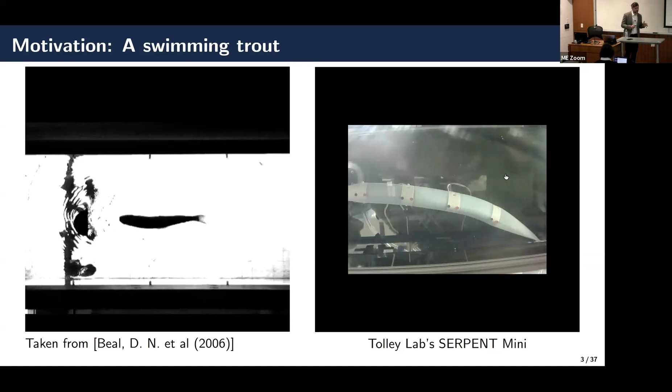So what you see in this fish, it has actuation. I'll go more into detail. We have actuation in these chambers. We have rigid couples in the middle, and we have several sensing things. So we have a built fish. What I really want to do here is go from a built fish to a model to a controller.

So the outline of the talk is as follows. We're bio-inspired. We have seen these eels can swim up. They're very efficient. We want to do this for naval applications, to be able to swim for a very long time with a very minimal amount of energy. Mike has designed this soft robot to do some of these things.

That's where we started. Then we said, well, wait a minute, let's take this model and try to do some modeling of it. So let's go from here to a mesh, from a mesh to constitutive laws, and from constitutive laws to a finite dimensional model. Unfortunately, controlling the nonlinear thing in very high dimension is not possible. So building surrogate models, I'm telling you about this, comparing a few things, and then we plug this all into a control design, tuning of a model predictive controller, and then we kind of run it back. Okay, so that's the outline of the talk.

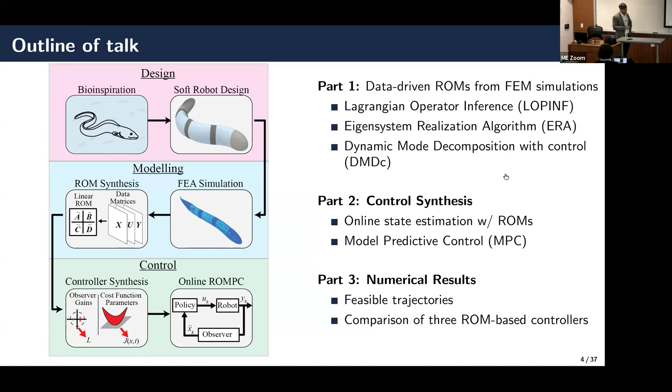For better or worse, we stuck with somewhat classical techniques, linear inference techniques of these three kinds. So I'm going to show you some comparisons, and we look at the end a variety of different tests that we made for that. That's the outline of the talk.

Okay, soft autonomous vehicles. Like I said, Navy is very interested. Other people are interested in this. Challenging is you have infinite degrees of freedom. It's pretty nice for a computational person because robotics used to be a very low-dimensional field in a sense. You had very few degrees of freedom. Now you have continuum robots, right? Infinitely many degrees of freedom.

They're hard to control in real time. They're also fundamentally under-actuated. We only have 6 actuators on this whole thing. Actuator design in the robotics community is a big deal.

We're using basically fluid elastomer actuators that kind of have an external pump. You can see some of these strings here, and they kind of pump fluid either into one chamber and suck it out of the other, so they have a plus-minus antagonistic relationship.

You can also do HASEL actuators, which are contracting muscles. They're a little bit more tricky to deal with, but that's also common. We just stick with one type of actuator. That's the one we've implemented.

Other things we have to deal with is, of course, in order to get this little twitch motion, you need many of them, but we can't have infinitely many of them. So then we kind of build chambers of a certain size. Here we only have 3. Of course you'd like to have 100 of those, but then you need 200 controls, right? So anyways, this is kind of what we have here.

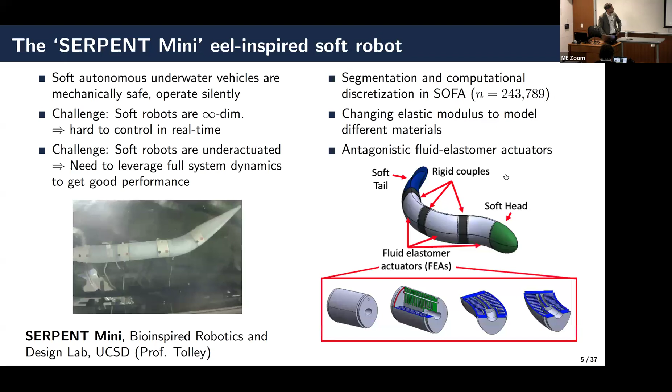They built the silicone molds, modeled it, have the geometry in CAD, and then have a FEA model. Nicely, there's a software called SOFA, which is really a cool modeling software in C++ for soft robotic modeling. It's just a little complicated to set up, but it does the job of what we need here.

This is our fish, just for orientation, coordinate system. We have 20 points on the center line. We either mark them in the experiment, so we have cameras and can track where the points are, or we read them out from our mesh.

These are our chambers. So we have 40 outputs and we have inputs, technically 6, but really we always choose this to be minus that, so it boils down to 3. Okay, so 3 input signals I'm going to have to design.

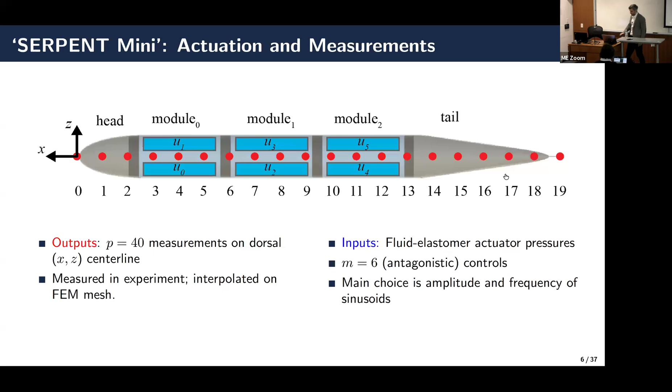So now we said, okay, what are we going to do? We can't work with the finite element model. It's nonlinear, it's high dimensional. Let's do something. So in the first part, I want to walk you through a little bit of reduced order modeling, some methods that we had already developed at the time, and then we're kind of ready to use on this problem. I just want to step through 5 or 6 slides of this method and then show you how we used it.

So here's a Lagrangian model reduction in one slide. If you have Lagrangian mechanics, it basically boils down to you have a Lagrangian function going from this tangent space to the reals, so it's a scalar function. You can write down the forced Euler-Lagrange equations as follows, where the Lagrangian defines this equation, and you can allow for external forcing if you want to. And of course we have external forcing here.

This is not simple in colloquial terms, but simple in the terminology of geometric mechanics. So if you have simple mechanical systems in this configuration manifold, you can actually split these, and the kinetic energy depends on x dot, the potential depends on x. If you make a lot of simplifications, you can even write them as quadratics. And then you have this constraint that you have positive definiteness of the M matrix.

Forcing here, we model forces to be linear as well, linear actuation of our chambers and dissipation as well. And then you end up in this framework with a simple model that you have seen in engineering mechanics undergraduate curriculum for a while.

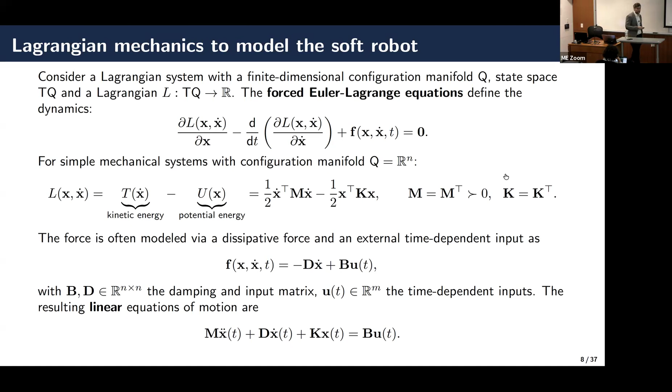Okay, so now this is the full order model. This is how you get to your full order model simulation or your full order model. What has been done? Intrusively, and in the model reduction world, there's 2 things. If you have this code available and you can go in and implement projections, then we call this intrusive model reduction.

Lall and Marsden worked on this in 2004, outlining some steps to do. Kevin worked on this 10 years ago in a previous research life on the intrusive side, also for structural problems. They're all intrusive. There's other structure preserving works. I stopped at 2020 here, but there's much more coming now.

You can do structure preserving Lagrangian neural networks and other things. Of course, you need to do some sort of dimensional reduction because many of these things at the time were not having a very low dimensional input layer.

Then on the non-intrusive modeling side, you can do all these things. You can do DMDC, you can do eigensystem realization. We'll do that later because it's very popular in engineering. Operator inference, lift and learn, other things. They all don't have Lagrangian structures. I could go on for 5 hours talking about how many modeling methods you could use.

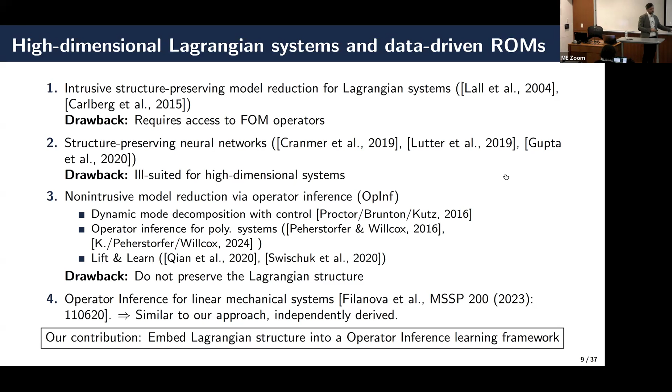Peter Benner's group has also worked on some second order systems, like without quite a mechanical structure here as well, Kevin. But not generally nonlinear potentials that are not just quadratic for the operator inference side of things. I'll show you those. We have - thank you for the segue.

Anyways, in 3 slides, I'll have it. Yeah, I kind of asked Kevin to come today and ask some questions - the ones that I would like. Exactly, thank you.

Okay, so what we do in this business is pretty simple. We stack snapshots - all of you have done this. You collect simulation data, X, Y, U. So you need to know what inputs have driven your simulation. You measure outputs and states. We do linear reduction here.

So we use an SVD, old classic. We get reduced states, and once you have reduced states, either you have reduced derivatives or you just process them very high - we're assuming no noise here. You can of course do total variation differentiation or other things, but we just use very high order finite differencing to get derivatives. But there's a way to get derivatives, let's say that.

Things look very easy here, but I just want to motivate them. So now we say, hey, at the reduced setting, we're going to have a Lagrangian system. Very simple. Even the M matrix now becomes the identity. The forcing is all linear. All that stuff's very general. We just enforce that, and by enforcing this, we automatically impose symmetry conditions.

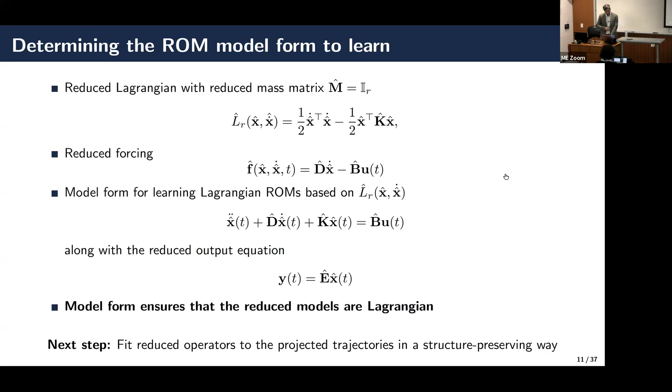And so now I hypothesize that this is my model. What does this boil down to? The learning case - this is a really interesting case. You have second order dynamics. You have X double dot. What you don't know is basically your D and your K matrix as well as your B matrix. What you do know, however, is that these D and K matrices have some symmetries and they're positive definite. And B is something that just tells you where your inputs are actuating the system.

I'll relax a lot of these assumptions in a bit, where we learn general M and we learn nonlinear things. But right now, let's just say we're doing linear things. You can solve this with semi-definite programming, and then you back out your output matrix just like you would do in any other method too. We have done this in other soft robot applications - one of them I'll show you today. And so now, Kevin, this comes to your questions.

What do you do if things are nonlinear? Of course, now you can start using nonlinear parameterization. So either you can learn very specific forms, or you just parameterize the nonlinearity a certain way with a network. So we've also looked into this.

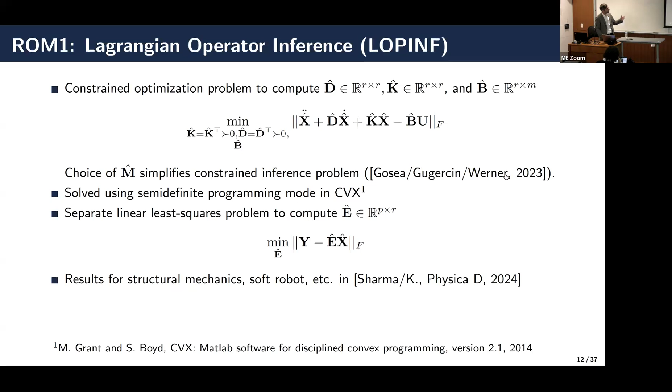The issue here in the previous formulation is this is a really nice formulation if you don't let the mass matrix also be a variable. If it is, then you get the trivial solution to be the solution, which isn't good for optimization. So we first optimize over this, and then in the second step, we correct the mass matrix.

Through a network. So basically now you would say I have a general nonlinear Lagrangian system with nonlinear potentials, and you have them here. These are parameterized now by MLPs basically, and polynomially augmented, because we suspect that low order polynomials will continue to show up in these, which they do.

So in the first step, we do a two-step approach. In the first step, we just learn the linear dynamics. That's the prior for learning the nonlinear corrections in the second step. All in a Lagrangian setting, making sure that the energies are always ensured to be positive, and that we have symmetry. We basically get this M matrix by taking the Hessian of the potential that we learned.

And that way you know that you have that, okay. So that was just a Lagrangian method, very, very simple. We actually kept everything linear here. I mean, we've done this nonlinearly on structural mechanics, on beams and vibrating structures, but even if I had a nonlinear model, I would have to control it some way online in a processor, and we kind of like to have linear models there hooked up with controllers.

So this is an extension not used on the soft robot here at the moment. Daniela Rus is very famous in soft robotics and robotics in general. They looked into this up at MIT in like 2012, 14-ish. They started developing these small little fish. You see this one only had basically one actuation mode here, and this was their rigid couples and then the head that basically couldn't move. And they actuated, and also this was kind of the starting point where many of these designs came from. The one I've shown you had multiple segments now, right? But you could get really nice bending moments here. Okay, so this was the first model.

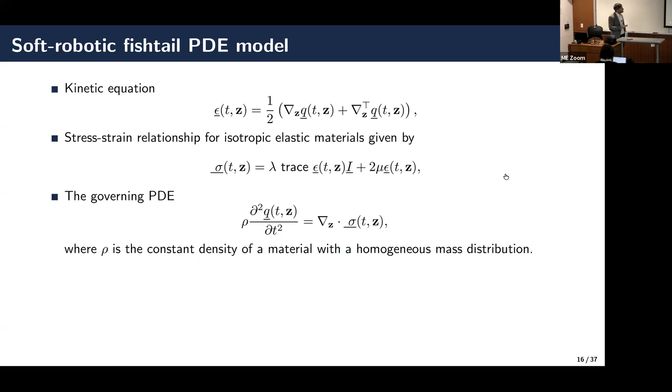Equations of motion, pretty simple here. At least we don't do any fluid structure coupling, so right now this is just the structural dynamics of it. You have a governing PDE, you discretize it. And now we run some experiments. So we did this Lagrangian operator inference. We generated data of this simulation. This is a linear simulation, so it doesn't take too much time to run it.

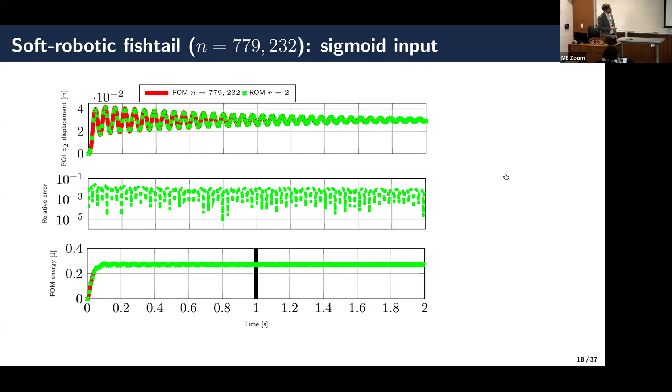This was sinusoidal. Then we did sigmoid input, also tracked reasonably well. You see the displacement here is not bad. It starts decaying because it starts dying out. Here we had to train for about a second, so we could predict about 100% out.

And then lastly, I did a step input, which was an input that was not seen in training. It was trained on sinusoids, and then we used a step. You see, if you drive the step input, your energy originally, when you insert this energy, it kind of spikes up, but the model eventually recovers, and then it recovers nicely and just remains stable. One of the great things about enforcing structure is that you have stable simulations, and you retain some of the physical properties that you have, interpretability, for example.

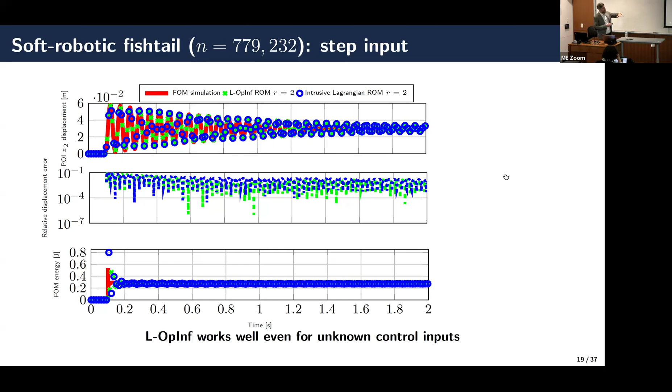Okay, so this was all the linear model. This was just kind of a precursor before we started working with the robotics people. Now, this is the first model that I will use later on this actual fish. A second model that the grad student came to me and said, well, one of the things people use is ERA. I said, okay, use it. Eigensystem realization, very, very well used in the community, over 40, 50 years of research.

It requires technically you to do what's called an impulse response measurement in discrete time. So you kind of have to excite every channel and then see how the rest goes. If you don't do that, so if you have a more broadband signal that's not just impulsive, but a more general signal, then you have to do something else, this observer-Kalman identification step.

But you can combine both of them, and when you do both, you basically get your linear model out. This is classical stuff - you have a matrix of Markov parameters, you shift that matrix, compute an SVD of it, and then back out the B and C matrices by reading things out, and the A matrix by doing a bit of inversion of the leading Hankel singular values. So there's inversion involved, and you have to choose a reduced model dimension, but it's fairly standard to use this.

The one thing to keep in mind is that this works for a single trajectory. So you're collecting data from one trajectory, but if you have multiple data sets, you have to think about what to do - you can't just add Markov parameters or do something like that. You can fit multiple models, for example, whereas in SVD-based approaches you can just stack a bunch of data into a big data matrix and take an SVD. Here you can't do that. So when we compare with this method later, we'll compare it to one trained data set, versus SVD-based methods like DMD or operator inference, where I can train on two or three data sets.

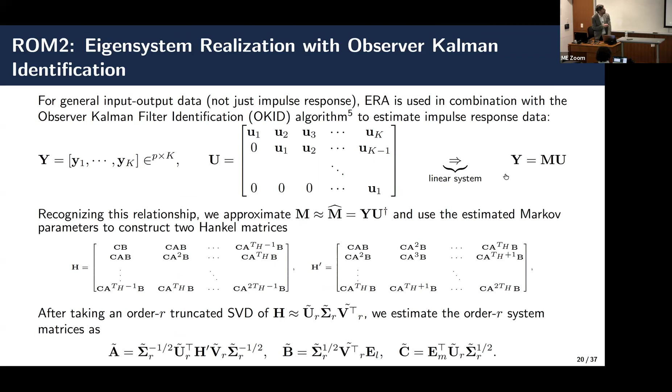Now the more interesting thing comes when we think about control synthesis. So how do we do our policy? I want to spend a little bit of time here.

We start with the plant, which is our simulated robot - the finite element model. This is not really control affine, but we have a linear output, and it produces an output Y. We will do reference tracking, so there's a reference given to us - a biological, bio-inspired trajectory that a fish could swim - and I'm trying to track that. I'm trying to figure out if I can get my fish to do the same thing.

So based on that, I do a couple of things. First, I need to create a state estimator or observer. We use a Luenberger observer here because it's the simplest thing to do. That gets you an estimate of the state of the reduced model - that's where the reduced model is used. So the reduced models, whether DMDC, Lagrangian operator inference, or eigensystem realization, will be used here, either with or without a D matrix, to do the estimation.

And then the state estimate goes into the control as the initial condition for your control policy, and then you do rollouts with MPC, trying to figure out what's your best short control sequence for the next several time steps, and then you keep repeating that. I'll give more details, but that's the idea - you go from here to there.

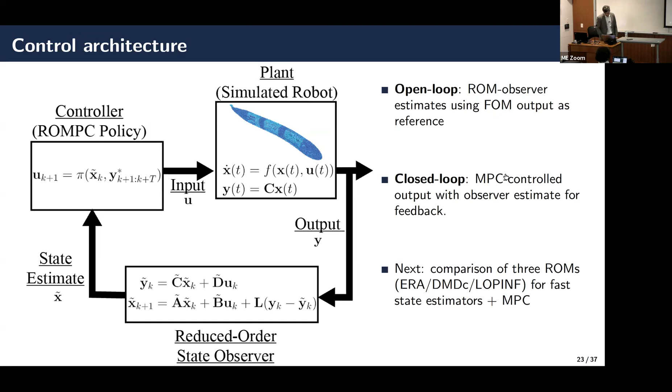Okay, good. So a little bit about the observer - this is probably the first thing you would do if you build a state estimator. You have your previous output, and you're looking at the reference state that's given to you. Like I said, there's no D here - that's the one that allows you to actually calibrate your reduced state. And then you do this.

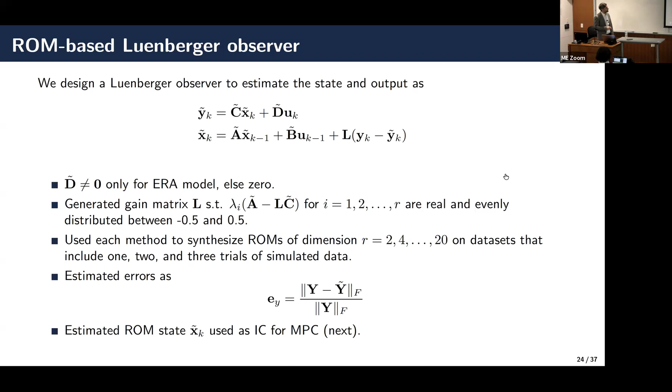One of the things you have to do is tune this L matrix a little bit. You can tune it as much as you want, but what we did is just wanted the spectrum of A minus LC to be in a certain range, and that did the job for the discrete time system. But you can play around with this - it's just gain tuning, and of course you can use a Kalman filter or other things. But Luenberger did the job here, and then we have the estimated errors. These become the initial conditions for the model predictive controller.

So now what does the model predictive controller do? It tries to find a control sequence. You're kind of at time step K now. You know what your control was from the previous time step. You have your best estimate of the state. This basically says initialize whatever the Luenberger observer kind of gave me. You know what your previous control sequence gave you, and you're trying to figure out a control from 1 to a certain horizon, so maybe 5 or 10 time steps.

And you do this by minimizing a cost function. The cost function is now also rolling out from 1 to t further into the future. Your target is whatever you're trying to hit - this is your target trajectory, which is the bio-inspired trajectories we have. And then you're penalizing from that, but you're also penalizing how much control input you need to do this, and penalizing a little bit of the difference, so you don't want your controls to jump too much between time steps. There's typically a little bit of a rate limit that controllers have and actuators have, and you need to implement that.

The reason this MPC works so fast is because you have a linear model - nonlinear MPC is a whole different story. We upper bound the controls by a U max, which is the max pressure that the pump can actually have, and we have antagonistic constraints. We technically have 6 controls, but really we're just learning 3 - the other ones are just a negative. So that's the online MPC that we're solving with the reduced models. Now we're solving them with like 3 different reduced models.

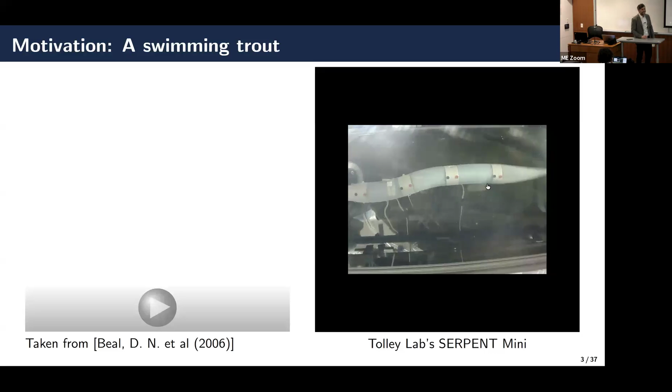Oh, you want video-based learning? Without this simulation model? Yeah, you can do that, use some RL. We have videos of this. I have to check with Iman, but this is an older version of the robot. They currently have a newer one that actually has better kinematics, to be honest. I don't know how many points they have on it—on this one we had 20 points, and we have video data.

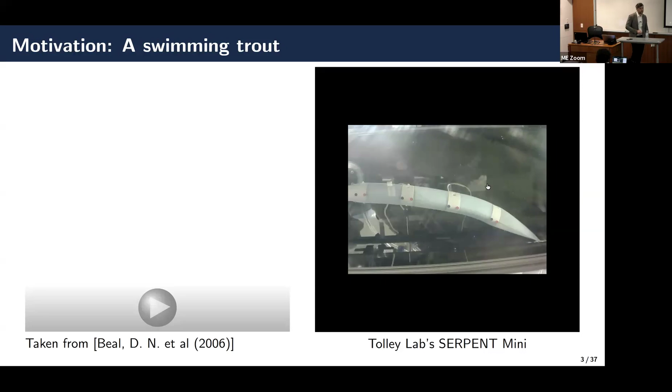We're only using it as reference trajectories, not to learn the model. I don't know if Daniela ever had videos of her robot up—I know there are snapshots, but I don't know how publicly available that data is. This is Daniela's one from like 10, 12 years ago.

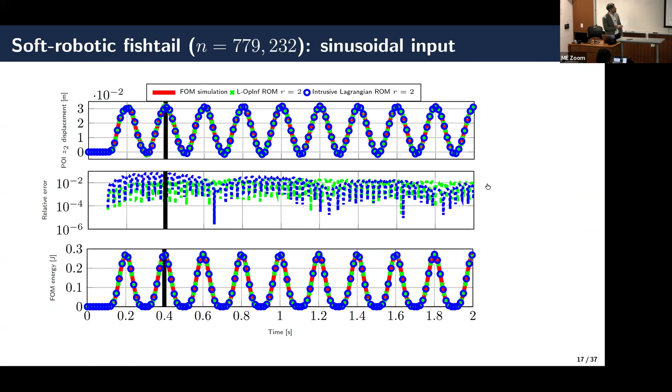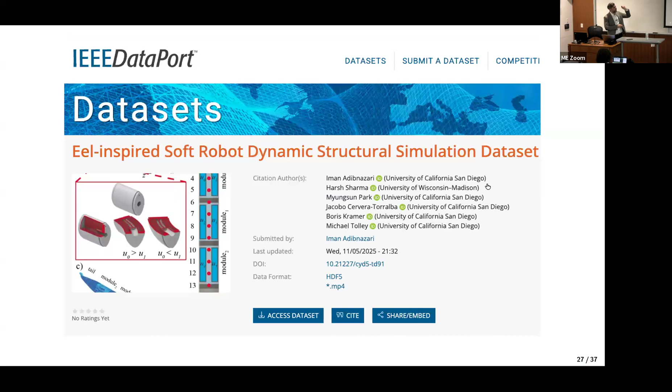Okay, so we're hanging out somewhere here in the control sense of this—tuning, talked about how we generalize, data set available so videos are on there. I just have to make sure the markers would be there, so I'll check with a grad student, with Iman.

This is what Iman calls open loop outputs—give me a control sequence, give me a forcing, run the model, and see how good the ROM tracks the FOM. Closed loop is how good the observer estimates the state. There's no control here yet, it sounds open and closed loop, but it's just the closed loop observer run and open loop.

There's a lot of data, I don't want to point you to all of it—what matters later is once we hook them up. But you see we have these three methods, you can either train them. Here's model dimension—we had three model dimensions, 2, 10, and 18, using one training trial. And then you see either running in open loop, so pure prediction, or in an observer setting. The main thing I want you to take away here is that these models...

Oftentimes we're off by a little bit in the phase, and all of a sudden these time domain plots just don't show that—they look horrible, but they're just off a little in the phase, so don't let that make you too nervous. What we do see is that in closed loop operation, all these models are doing much better than they do in open loop.

The other thing is training on multiple trials. For some reason, I couldn't get DMDc to get better when it had a third trial, but in OpInf we did a little bit better. I think you would just not do that and pick that model, to be honest. So increasing data kind of helped for these two methods. ERA, I mentioned, can only be trained on one trajectory unless you want to do operator interpolation afterwards.

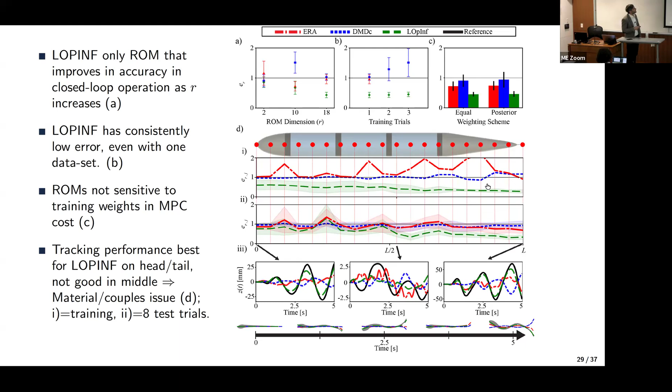You're trying to see how the vortices created by the fish create thrust. So they parametrized the motion of this anguilliform swimmer with a function - a very simple function to just plug parameters into. You look at the tail beat amplitudes, growth rate of the amplitudes, frequencies, and wave and body wave number, and it gives you about 12 data sets. This has empirically been observed in experiments in the water tunnel to be a shape that's reasonably well parametrized.

So now we want to see, can we track that with our robot? Actually, not with a robot, to be honest - can we track it with the simulation we have?

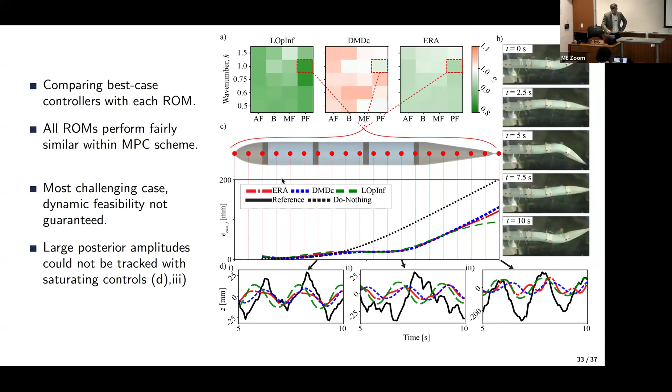Okay. And then you start seeing, so now I said, well, can we just look at the control signals? Like, what did we actually compute? Mind you, we have 3 chambers or 6 chambers and 3 controls. When we generated the videos in the water tank, these are the nominal control signals that were fed to the pumps.

First pump, and then most excitation in the rear end, the posterior of the fish. You can read out the phases and magnitudes of those. That's nominal. In this version of the fish we don't have a pressure gauge, so this isn't in terms of pressure. This is the electrical signal being sent to the pump, so I don't really know what the actual pressure is.

That's the next thing - in the next version we already have a pressure gauge, but I don't have the pressure gauge data yet. So this is kind of a proxy. In our code, these correspond to pressures in these chambers.

The main thing I want to show you is that step function-like behavior we have, the amplitudes, the phases. Now these are the control signals that the ERA-based MPC produced. These are the ones the DMDC MPC produced. And these are the ones LOPINF produced.

You see all of them hit saturation, so we're hitting these bounds. We calibrated at a certain point - some saturate more than others. We see that both of these are doing the best at matching the phase, at least part of it. If you compute a spectrum of those, you're pretty close. Amplitudes we're not getting perfectly correct because we can't match the nominal with what we have here at the moment. And ERA just doesn't produce anything - it switches too often and is a little too erratic.

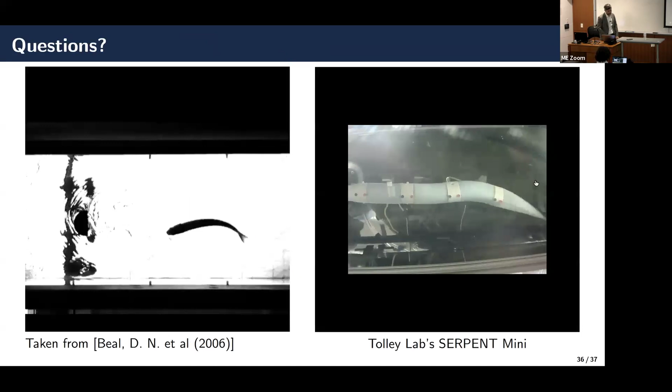If you're interested, Iman just managed to put this up two days ago. You can read into this. There's also a data set and a couple more methods papers along the way. I think that would probably be it. I'll leave it here with two more of these videos.

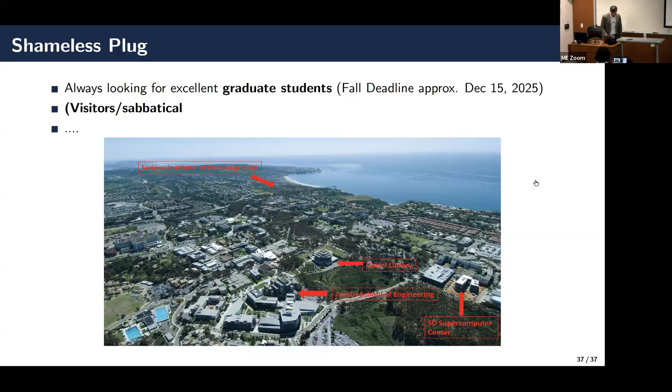Like I said, what we have is the dead trout swimming upstream. In case there are any grad students, we're always looking for students to continue this work. We're pretty close to an oceanographic testing facility, so worst case, we just throw it in there. Okay, thank you, questions?

I have a question about the flow they're tested in. Is it like, are all the tests done in still fluid, or do you generate flow? They don't have a way to generate flow right now in the mechanical lab. That's why we need to go over there to actually create a stream.

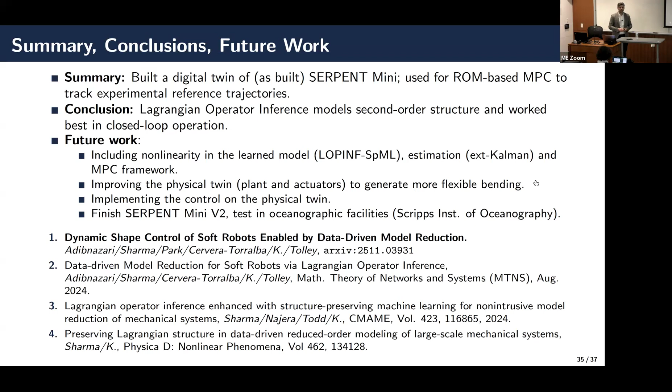Yeah, that's what fish do, right? They optimize their technique based on... exactly what this guy did, right? Yeah, that's the next step. Yeah, 100%. I mean, right now they're happy that that thing swims.

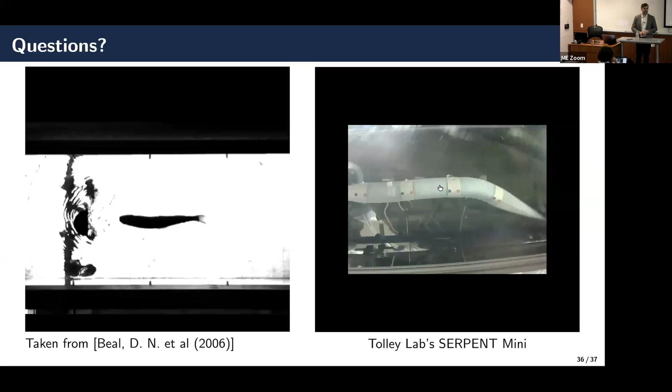I don't appreciate it all—I sometimes don't have the full understanding of everything that happens, but it's quite an endeavor. Even fabrication, like what material to use, how you do the casting, how you do the molding, how you put it all together, how you couple it, how you make sure it doesn't leak. There's a lot of things you have to do. But yeah, so many more avenues. Mike has a MURI on this, or he's part of a MURI on this, so they're continuing to work on new iterations of the fish. I fully agree with you.

We know fish have controlled actuation of their muscles, but they also have environmental forcing, like vortex shedding if they're going up a stream. Something I found very difficult in doing data-driven models, even for linear models, is taking into account environmental forcing if you can't directly observe it. So just totally speculatively, what are your thoughts on that? Because I understand that's not what you're doing yet here. Yeah, that's a fantastic question.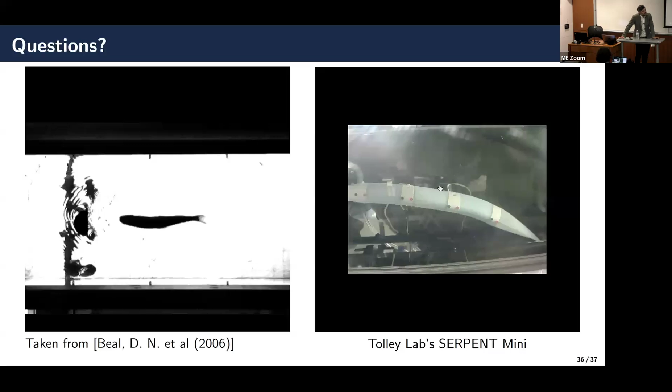I think the place to go is this Tytell paper from about 20 years ago that put this thing in a tunnel and did PIV measurements to get an idea of the flow field and the forcing. There's other work too—there's a person down in Florida with a very high-speed camera to resolve flow physics in soft swimmers. Mostly they take that and try to parametrize and come up with a simple parametrized boundary condition you can impose. But it's very clear it's a super hard problem to impose the fluid realistically, unless you want to do the full coupled simulation, which we all know is pretty expensive.

So speculatively, we're probably hoping to get some parametrized empirical models for that boundary condition, because I don't think we have the fluid setup right now to get the full 2D flow field. That's my feeling, but that's one of the big open issues in this underwater robotics space.

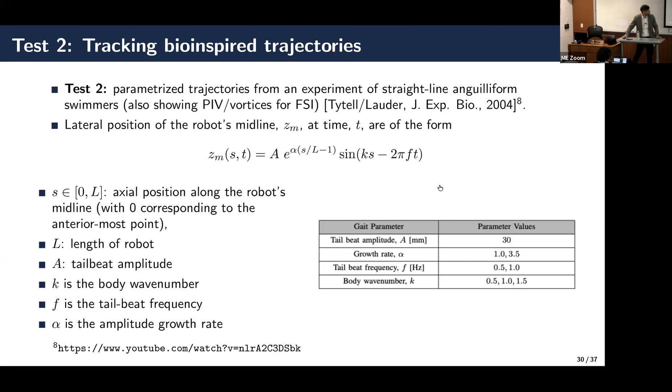Nathan: the development of like, they put aero rigs on cars—is there anything like that you could put on? Have they considered that? I don't know, you're in the space, tell me more about this. What is it? Aero rig—car, plane. It's basically a rigid structure where you have a bunch of pressure taps all around to sample flow physics outside. You try to make it very low aerodynamic impact, but it allows you to sample the flow around the car.

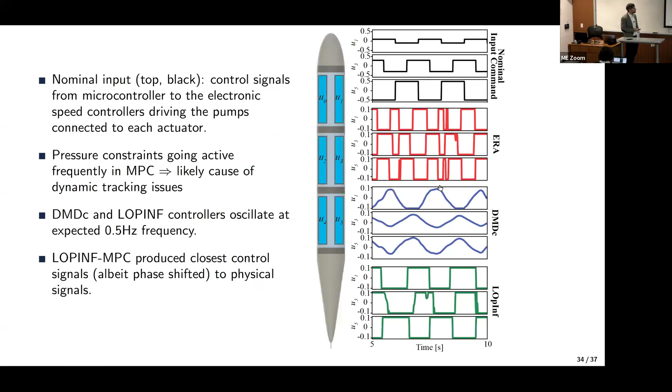Imagine if you put this near the head, you could at least get a sampling of fluid coming towards it, some estimation of the flow physics that it's in.

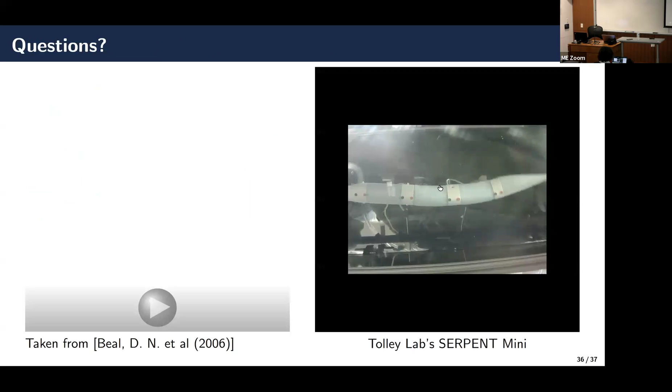Yeah, this is a bit above my experience, but one of the things they do in this MURI, I mean, one of the big things, they're roboticists, they build this stuff. Lagrangian operator inference is not part of their business, nor are they overly worried about this. What they're worried about is building a fish that works pretty well and does exactly what you said. So they're working on sensing in fish. Fish have an interesting way of sensing - they have these micro hairs you can use. So what they're working on right now is putting these little hairs, whiskers so to speak, along here to get an idea of the flow fields.

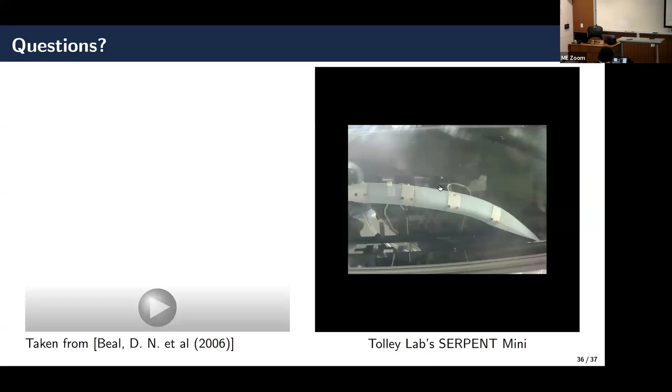To make a sensor that small and measure something reliably is super hard. So one of the teams in the MURI is doing exactly that, with the ambitious goal to peel a skin over this thing and get a full sensing field. Maybe they're in year 2 or so, so maybe by year 5 they'll be somewhere. But yeah, that's super exciting, just getting more information.

I'll relay what you said about putting it on the head - maybe that's something they haven't thought about, but they certainly are thinking about putting it on the skin. But reliability, of course, that sensor would then have to last quite a long time.

Yeah. We have a question from the chat.

How would you add nonlinearity to the system, adding external forcing? And would the methods here still be applied for a nonlinear model?

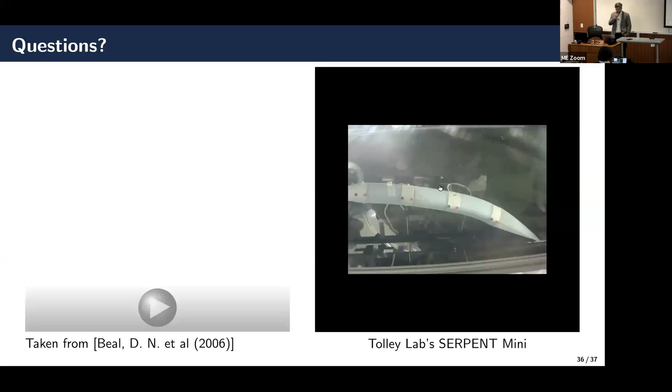Yeah, sure, we can add a lot of nonlinearity. I was talking about this a little bit at the very beginning. So we do have a method ready to go, frankly. This is a nonlinear Lagrangian reduced order model that's parametrized, that starts from the linear Lagrangian model and augments it by polynomials of cubic and quartic order, and everything above MLPs. So we have a Lagrangian framework for this.

But even if you have a nonlinear model, you've got to think about how you're going to design a controller. It has to be real time, it has to run on the microprocessor. So are we just going to linearize this thing again and do MPC? I think it's a question where we started from the back end and said, how do I want my controller to be? Where do I start from a controller? What kind of model would be reasonable?

There are also energy shaping controllers, so you can actually design a controller based on a second order structure directly. We've also started looking into those, but the implementation of that is another issue. So many interesting questions around this space. For the person that asked this question - we can do it on the modeling side, but we don't quite know how to do it on the control side.

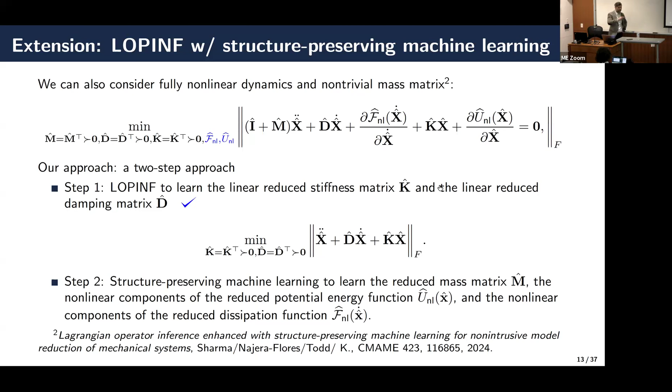Yes. Yes. Uh-huh, yeah, there was one of those. Yeah, I had one. This one? Yeah.

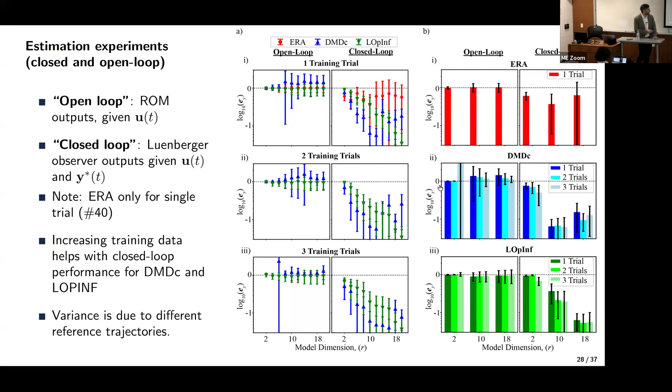But in other methods, it really didn't help doing more trials. Yeah, I don't know. I feel like we already have a pretty broadband excitation in what we have here - this is many cycles of the experiment, right? I mean, we're going for about 10 seconds of data.

This may be an ill-posed question, so bear with me. The AI community has a lot of focus on sticking with canonical modalities like video and audio that you'd typically imagine AGI systems being equipped with to do everything, to infer the scene, understand intuitive physics, and be able to plan and control from that point. How far, in your opinion—obviously that's a huge leap forward from having specific sensor measurements—but if one were to try to tackle a problem like this using more commoditized sensing, how would you think through the roadmap to get there?

Good question. There's a person working on this stuff, Christine Allen-Blanchette. She's at Princeton. She has taken video data of things like the inverted pendulum and fed that data into Lagrangian neural networks, which are then able to make predictions, detect that this is a second order system, figure out stability properties, and so forth. I think they have not done this in high dimensions at all—they kind of come back out with a 4-dimensional model. So I haven't seen how this would work in high dimensions yet from video.

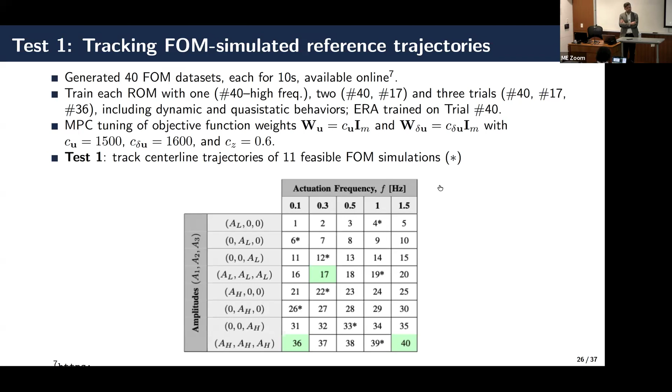I can't speak directly to it because Iman tuned it. I can't tell you if each model was getting 50% worse because you changed these weights. I don't know, I'll have to ask him and relay that. That's a good one. Yeah, I'm not going to speculate.